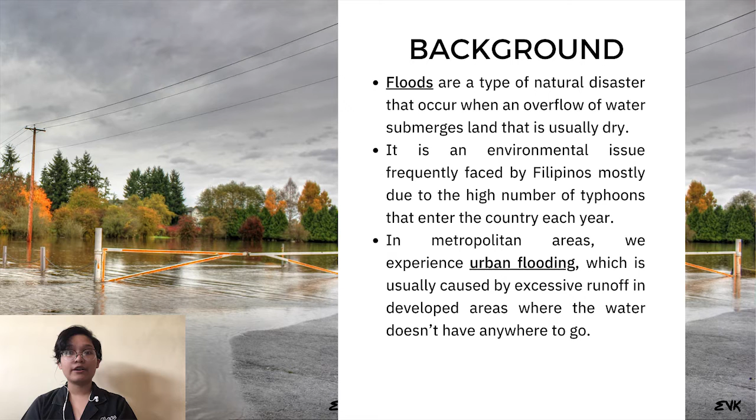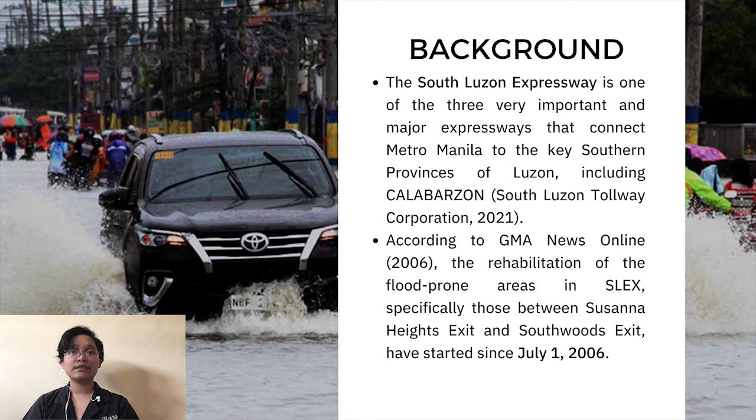Floods occur when an overflow of water submerges land that is usually dry. In cities, we experience urban flooding, which usually happens when excessive runoff doesn't have anywhere to go. In more densely populated areas, we observe higher flood hazards due to a variety of reasons. The South Luzon Expressway, or SLEX, also experiences such flooding in different areas despite past rehabilitation efforts. Specifically, the area between the Susana Heights exit and the Southwoods exit still experiences up to waist-level flooding, especially during heavy typhoons.

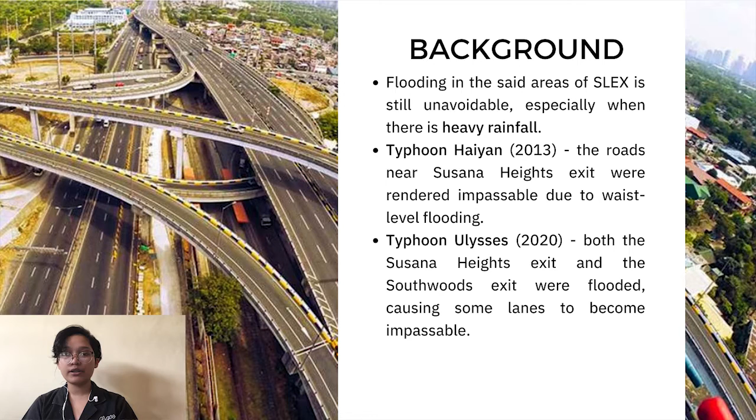For this proposal's statement of the problem, the researchers aim to find the causes of flooding in SLEX and look for the best alternative that may be applied to address this problem. Specifically, the researchers seek to find answers to these questions.

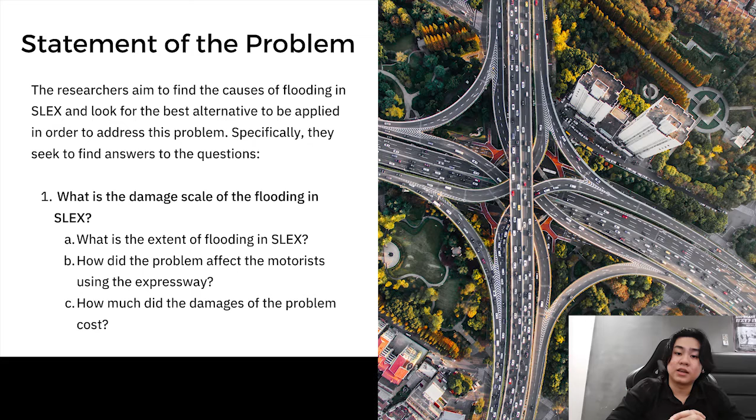Number 1: What is the damage scale of the flooding in SLEX? This includes the extent of flooding, the problems it has caused to motorists, and the cost of damages. Number 2: What are the causes of flooding? This includes the engineering or geotechnical concepts behind the occurrence of the flooding and the flooding-induced hazards.

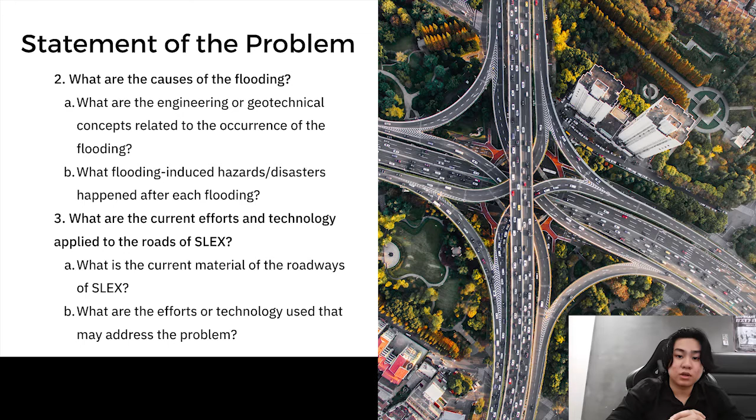Number 3: What are the current efforts and technology applied to the roads of SLEX, and of these, which ones address the problem of flooding? Number 4: What are the applicable alternatives that may be applied to address the problem? For each alternative, the researchers aim to find their advantages, disadvantages, and cost estimate. Lastly, number 5: in the concepts of engineering economics, what is the best alternative to be applied to address the problem? Here are some of the current efforts and technology done to address the problem.

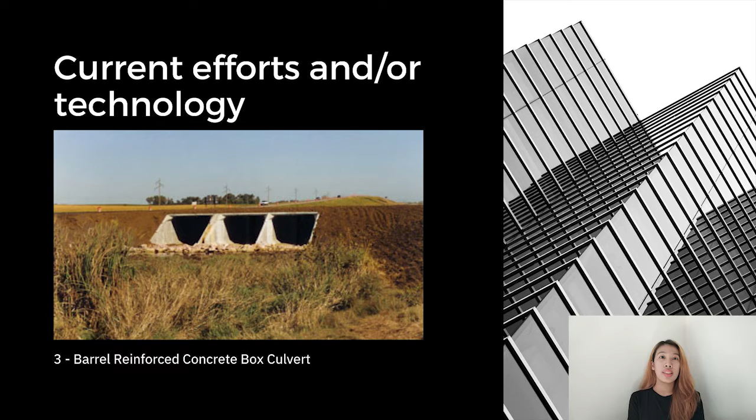The first is the 3-barrel reinforced concrete box culvert. Box culverts are positioned under the roadway, allowing water to flow underneath. This helps reduce flooding since it allows water to pass through below, decreasing the amount of water that passes through above the road. The installation of this was mentioned by David Umol, the South Luzon Tollway Corporation president, back in 2006.

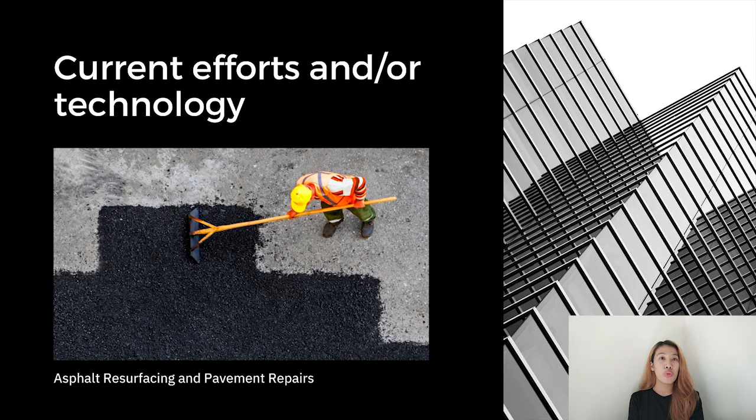The second effort is periodic maintenance of SLEX, including asphalt resurfacing and pavement repairs, both of which ensure the road has a smooth running surface and a good slope for drainage. With these, we came up with 3 alternatives: asphalt, concrete, and permeable concrete.

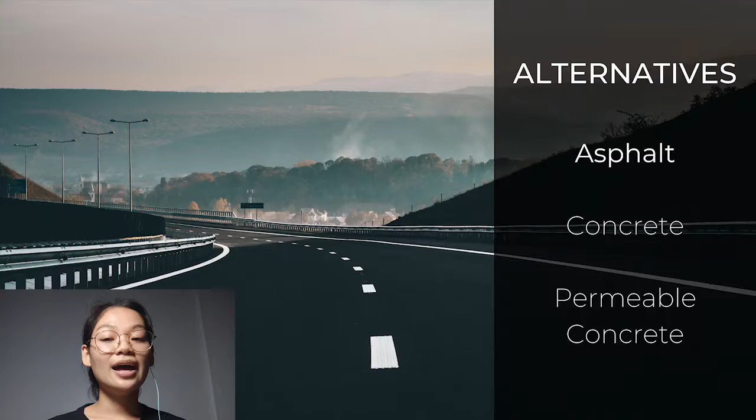Asphalt is beneficial as it is recyclable, cost-efficient, safe, durable, and fast to construct. However, it could feel hotter than it should be since asphalt pavement absorbs heat. It also needs to be mixed and laid properly to avoid cracks and breaks. It releases hydrocarbons and could possibly pollute the water, which are some of its negative environmental impacts.

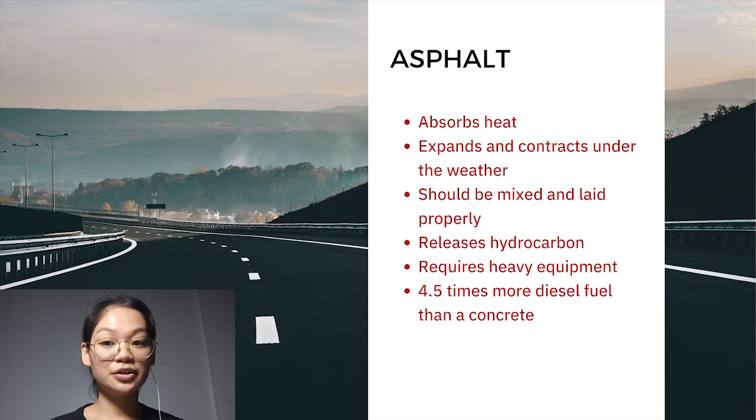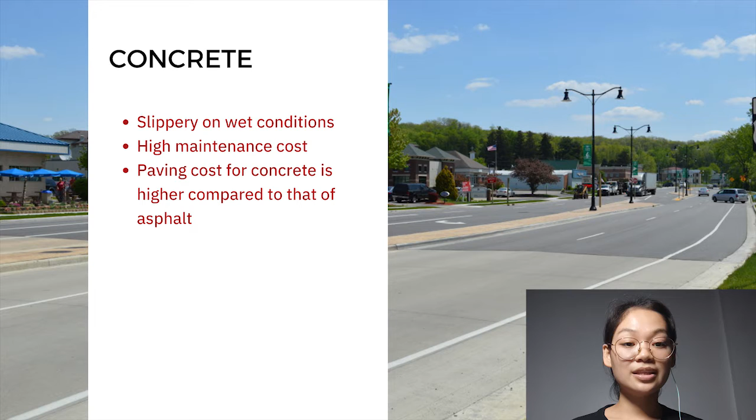Concrete has the same advantages as asphalt. It also allows vehicles to consume less fuel and provides good economic performance. However, it has higher maintenance and paving costs compared to asphalt. It has a positive environmental impact, such as reducing pollutants produced by vehicles, saving energy, and helping preserve resources.

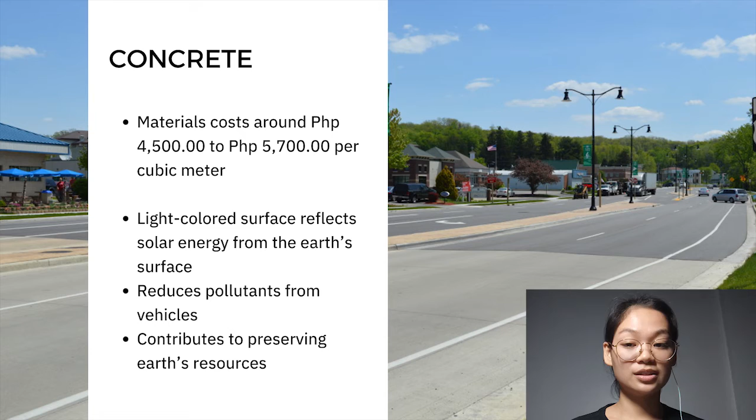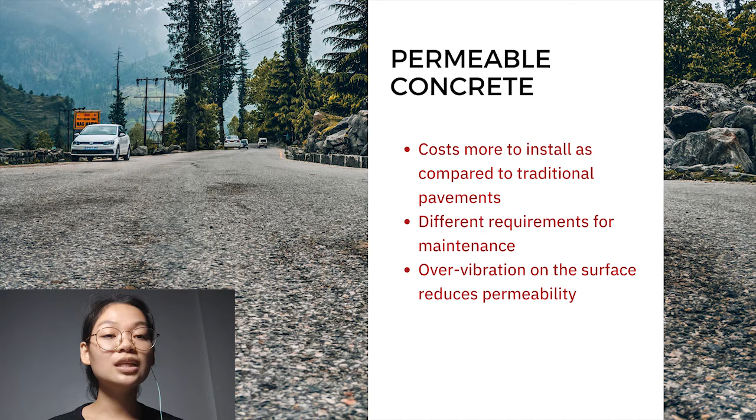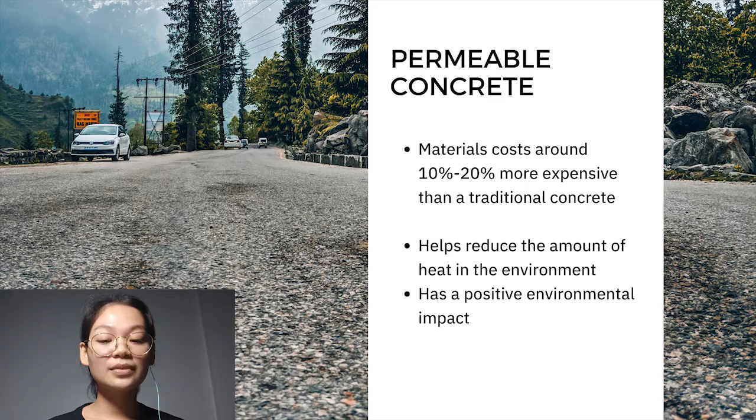Permeable concrete, on the other hand, provides the same benefits and even increases land utilization. Compared to concrete, it is quite expensive since it is not commonly used in the Philippines. Overvibration on its surface significantly reduces its permeability, making it not a viable choice for high-traffic pavements. It also has a positive impact by helping reduce the amount of heat present in the environment. Cost-benefit analysis between these alternatives would help determine which among them would best fit as a solution to the problem.

The data needed for the project are as follows: 1. Details or plan of the existing road. 2. Flooding data of or near the area. 3. Projected costs of each alternative. And 4. Hazard assessment of the area.

These data will be sourced from existing data from the previous construction or rehabilitation of the road, existing data from various government agencies, and lastly, Hazard Hunter PH.